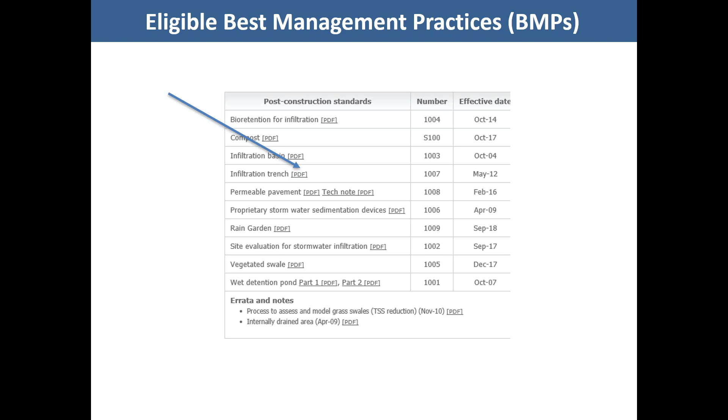The first BMP on the list is a wet detention pond. This practice is one of the most cost-effective options for achieving pollutant load reductions and is the BMP most commonly proposed in the urban construction grants projects. Keep in mind that these all have quite a bit of text associated with each practice, like shown here. I'm going to go through a few of these, but I will only show the photos.

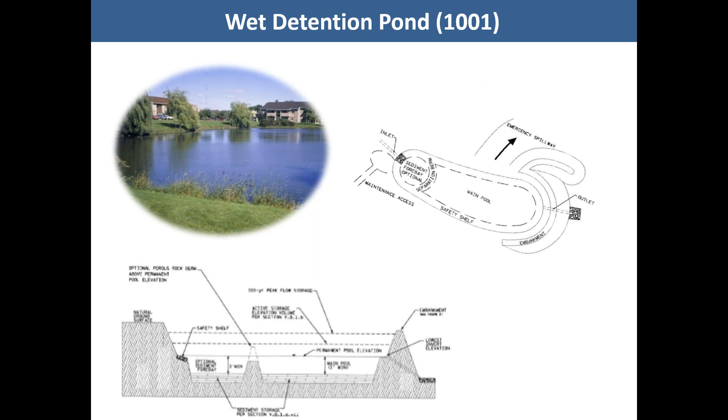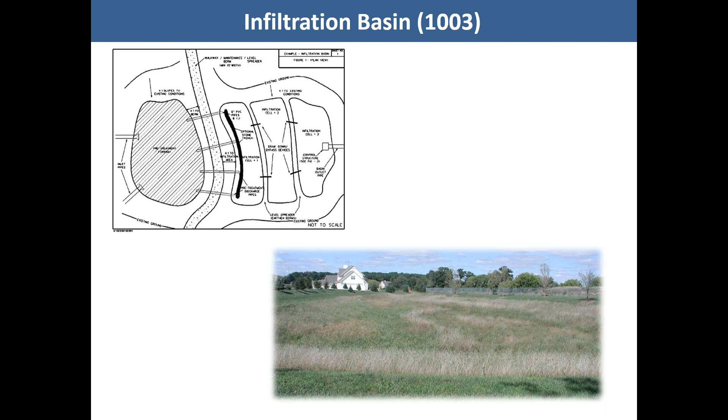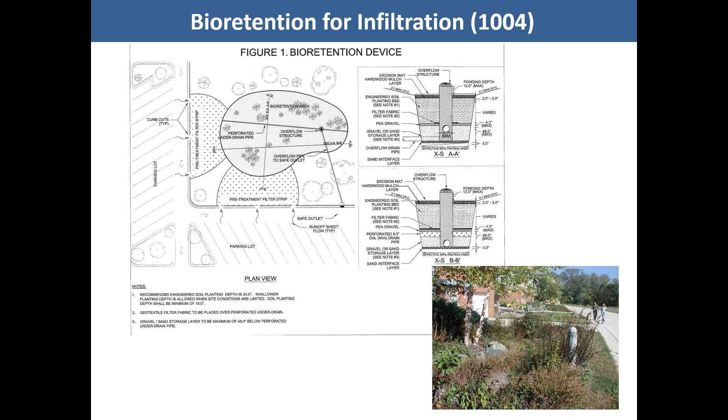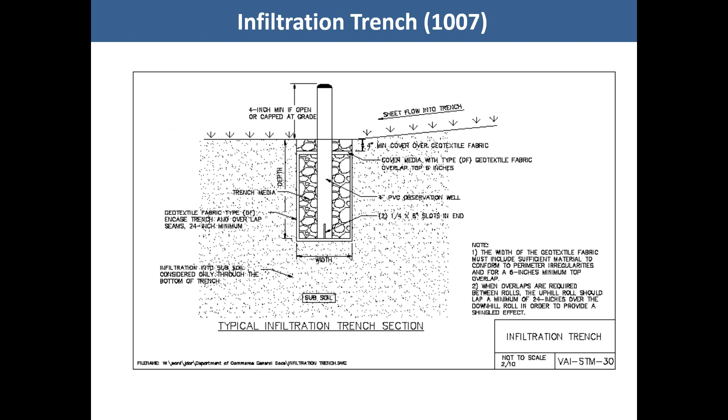Other BMPs commonly funded by the Urban Construction Program include the Infiltration Basin, covered by Technical Standard 1003, the Bioretention for Infiltration, covered by Technical Standard 1004, Vegetated Swale, covered by Technical Standard 1005, Infiltration Trench, covered by Technical Standard 1007, and Permeable Pavement, covered by Technical Standard 1008.

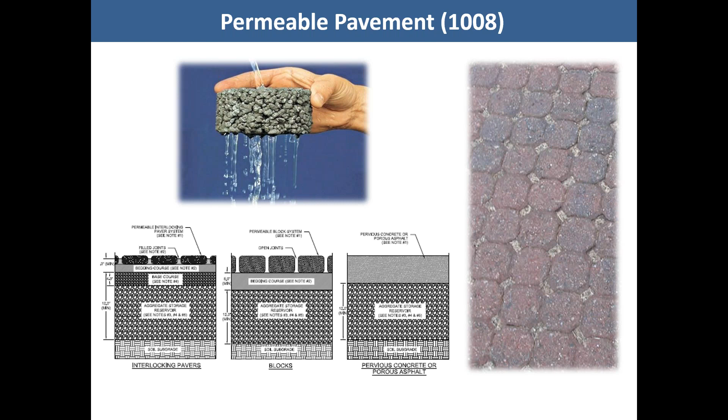Let's go back to the explanation of the Urban Construction Grant Program. In addition to eligible BMPs, the grant program can also reimburse other eligible associated costs and ancillary activities. Engineering of eligible BMPs constructed as part of the Urban Construction Grant Project are eligible.

However, urban construction grants are funded with state bond revenue. State bond revenue can only be used to fund engineering of constructed BMPs. This means that we're unable to reimburse the engineering designs until after BMPs are constructed and installed. So even though engineering is the first step of the project, it cannot be reimbursed until the project is complete. Furthermore, if a BMP is designed but never installed for whatever reason, the engineering costs cannot be reimbursed.

DNR will only fund one high-efficiency sweeper per municipality. The cost sharing for the sweeper only covers 50% of the incremental difference between the cost of a high-efficiency sweeper and a conventional broom sweeper. So listed on this slide are the other eligible costs and ancillary activities.

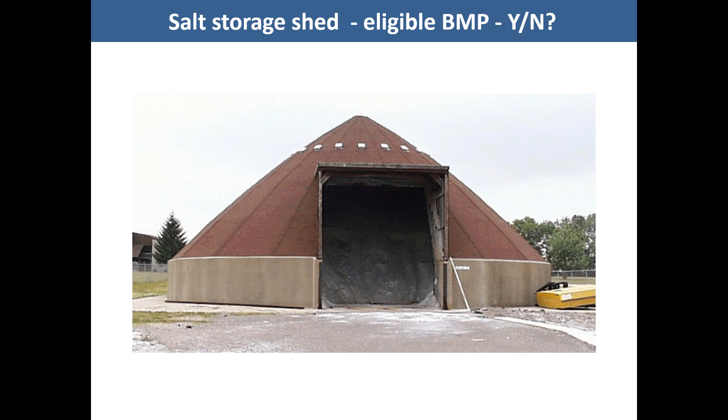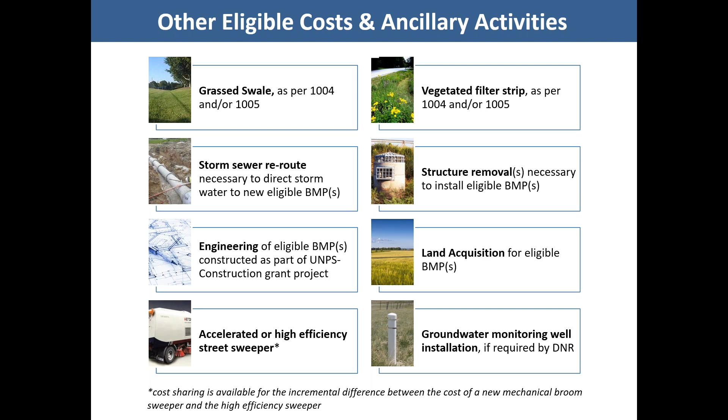So let's go through a few examples related to common questions we get about the program. Is a salt storage shed eligible for cost sharing under an urban construction grant? Winter de-icing management is an element of a municipal MS4 permit. To answer this, we need to remember that according to NR 155.151D, eligible BMPs are urban best management practices included in Chapter NR 154, or those that have technical standards developed and disseminated in accordance with Subchapter 5 of Chapter NR 151. So let's go back and look at the list of eligible BMPs that meet that criteria. We don't see a salt storage shed here. Maybe it's an ancillary activity. No, not there either. Salt storage shed is not eligible.

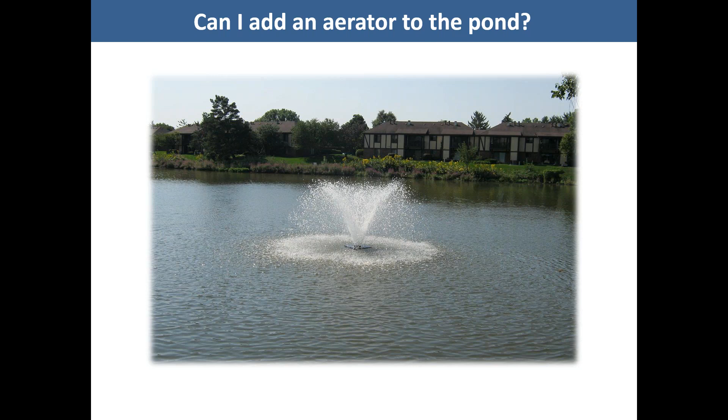Here's another example. Can I add an aerator to the pond? What if the project didn't cost as much as budgeted and the grant has underspending? Can I use it to put an aerator in the pond? How would we go about figuring out the answer to this question? Remember, eligible BMPs are those constructed according to standards. So let's look at the list of eligible BMPs. If the wet detention pond was the eligible BMP in the grant, we can then refer to the technical standard.

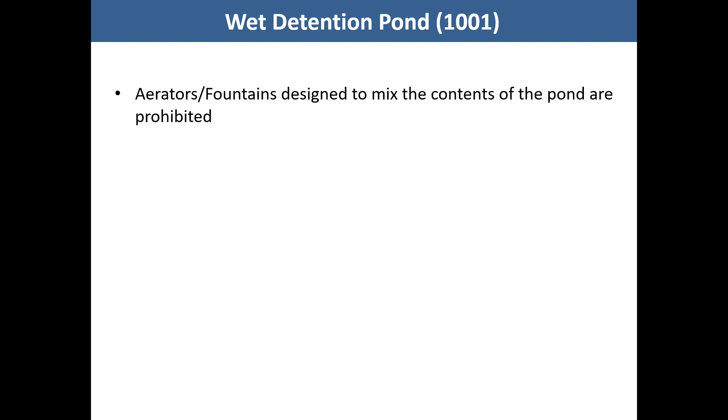So we know from NR 154 that a wet detention pond must be designed according to technical standard 1001. The first thing we see is that aerators designed to mix the contents of the pond are prohibited. Second, if an aerator or fountain is desired for visual and other aesthetic effects, they must meet certain requirements. If the pond is designed according to these standards, then the aerator is okay, but the aerator itself may not be an eligible cost if it's for aesthetics. There may be some circumstances where an aerator is eligible. However, in many cases, it will not be eligible.

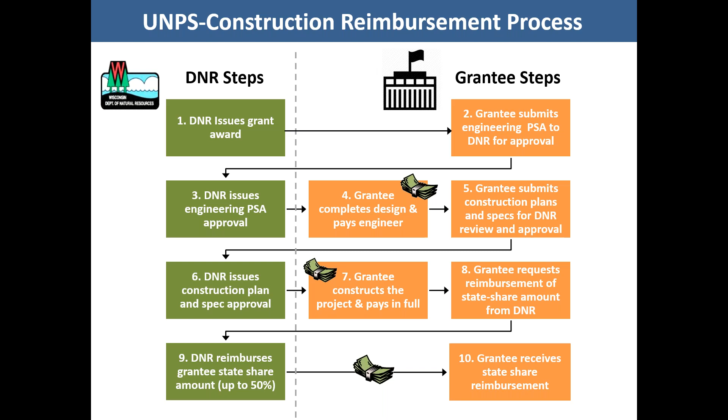And finally, contact your regional non-point source program coordinator early to discuss your project. Don't wait until the week before the application deadline. A week before is the latest. A month or two beforehand is preferred.

We want to clarify that contacting your coordinator should include, at a minimum, a discussion of the following subjects: project eligibility, the proposed BMPs, permits and other feasibility issues, and water quality need. Leaving a voicemail or sending an email just before the applications are due is not the same as a discussion.